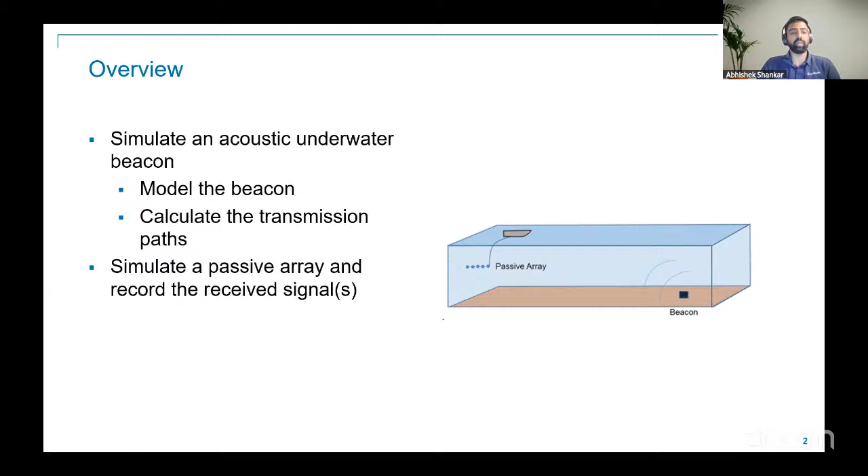All right. The last one we're going to do is of course the main part, which is using the direction of arrival algorithms to estimate the direction of the beacon. MATLAB has a bunch of algorithms inbuilt that you can use to get the direction of arrival.

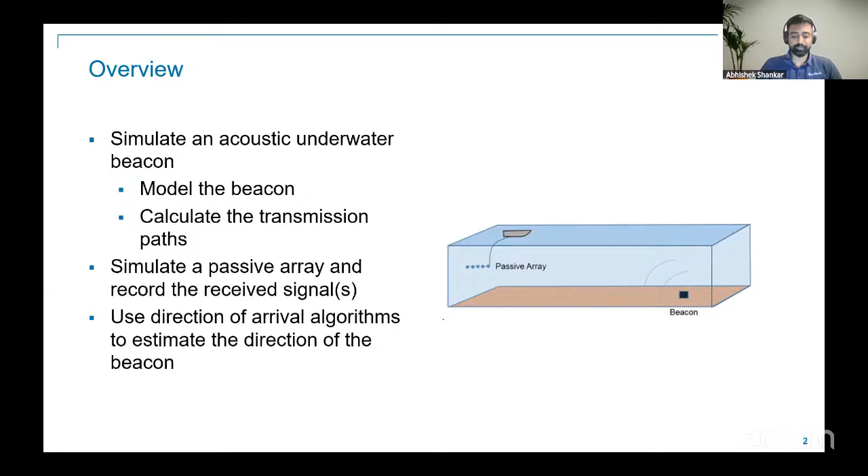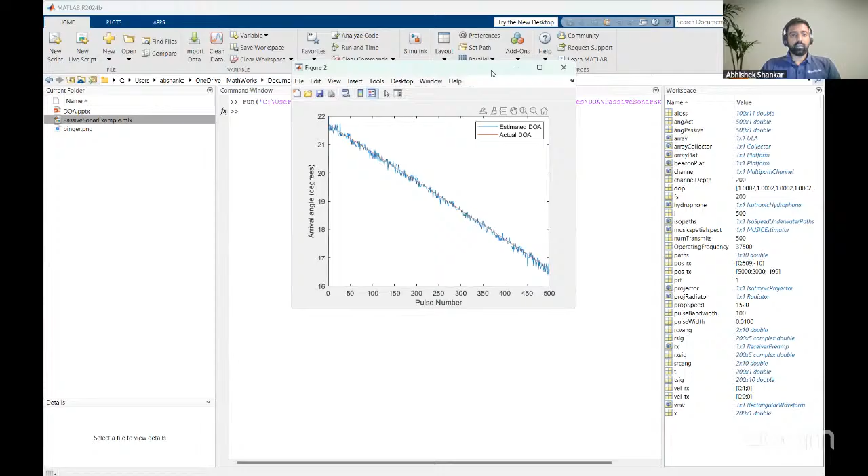And yeah, enough of slides. I'm going to switch to MATLAB. Let me quickly switch to MATLAB. Yeah. And I'm going to be opening up. Sorry, not one. I think you just saw the results of what I was going to show you. But yeah, this is what we're going to be working with today.

This is already a built-in example with the MathWorks. I can share the link to you in a bit. So if you just search for locating an acoustic beacon on Google, this will probably be one of the top results that you'll find. So I'm going to walk you through the example.

So it's got a lot of different things going on here. The first, like I said, we're going to be simulating both the beacon and the passive array. So that means the waveform from the beacon, how the beacon propagates through the water body, and also how the passive array is going to receive all these signals. And then we'll plot the received signal. And then finally, we'll go to estimating the direction of arrival.

To set the scene a little bit, we are taking a simplistic pool surface. As you can see, there are no other obstacles. It's just a beacon located 1 meter above the bed or the floor of the pool. And then we have a boat that is towing a passive array. So if you're in a RoboSub competition, you might already be underwater with your own hydrophone. But if you have a boat, it's typical to have like an arm or an extension that goes underwater with the hydrophones placed on those extensions.

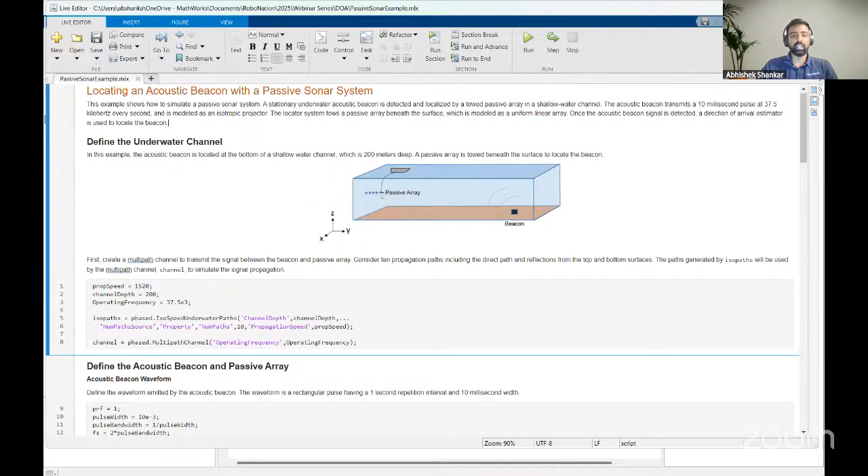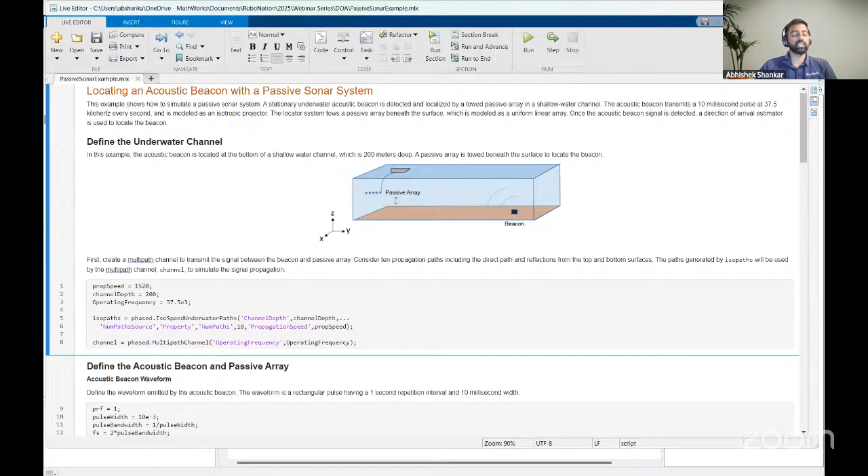And the towed array that's going to be attached to the boat is a uniform linear array. So as you can see, all the five hydrophones are in a straight line, along the y-axis. So it's a linear array of hydrophones, but there are different configurations that you can use to set that. I'll come to that in just a bit, but first let us go ahead and define some of the properties of our beacon and passive array.

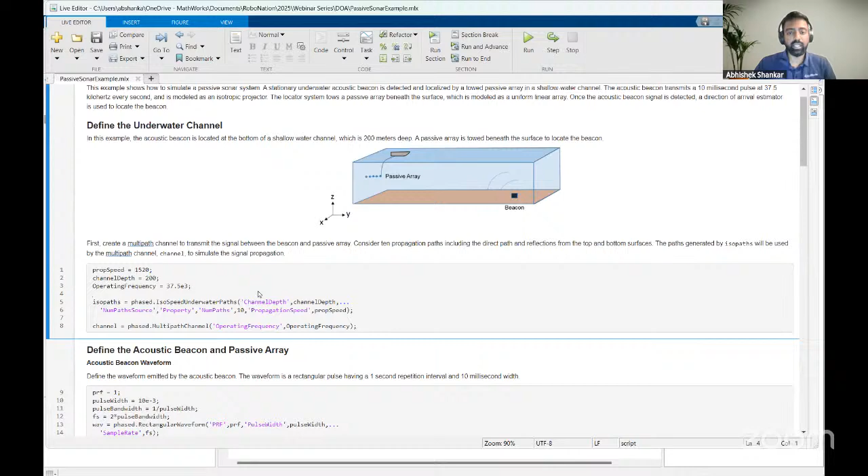The first one is the propagation speed. I'm going to be setting it to 1520. This is in meters per second. This is the propagation speed of sound underwater. It's close to 1500 meters per second. Again, it depends a lot on where, if it's ocean water, if it has a lot of salt content, or if it's just pool water.

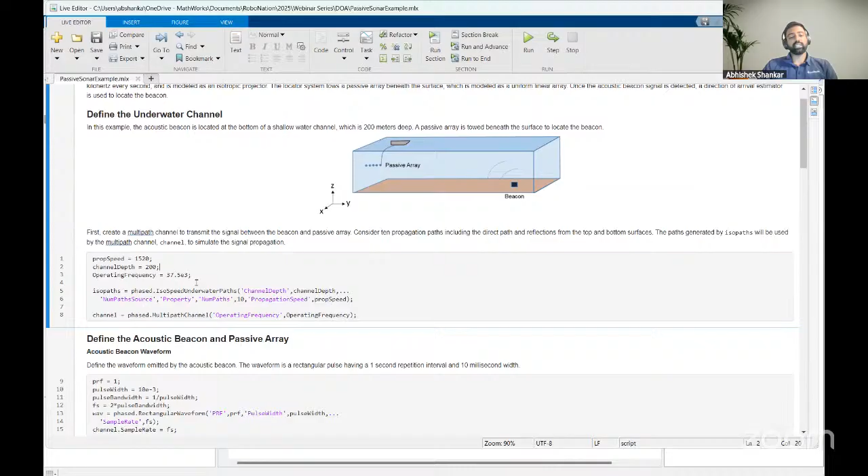So the composition of your water affects it, but it's generally close to around 1500 meters per second. And we're going to set the channel depth to 200 meters because we are assuming the pool is 200 meters deep. And the operating frequency is set to 37.5 kilohertz, as I had mentioned before.

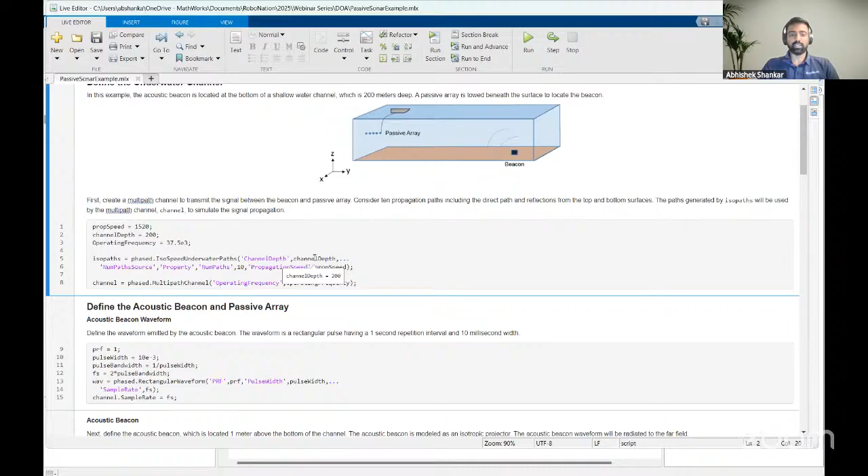Right. And the first thing that we're going to do is specify all the paths that the beacon can take. So I'm going to be using the isospeed underwater paths from the Phased Array Toolbox. Actually, before I go into what this does, let me quickly show you what the Phased Array Toolbox does. I think it might be relevant to a lot of you.

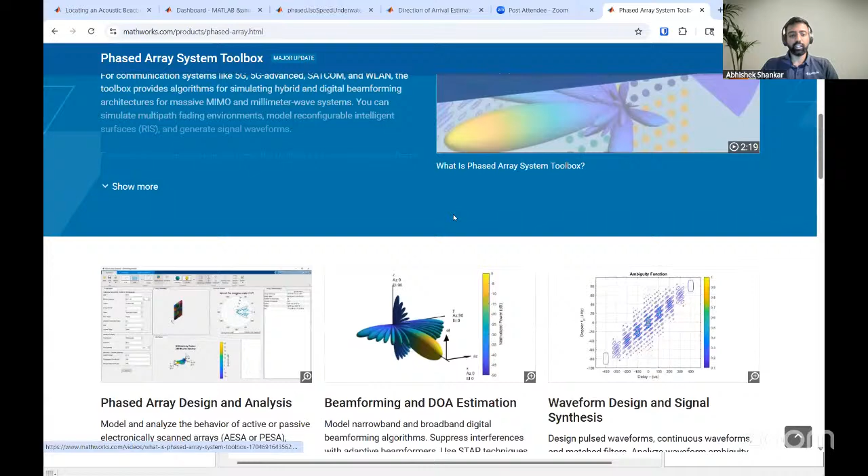Just Google phased array. So this is one of the toolboxes that is included in your free license. What you could do is you can design phased array systems. You could do direction of arrival estimation, which is what we're going to do. You can also design waveforms and synthesize signals. And you could do radar and sonar and all this cool stuff with this toolbox.

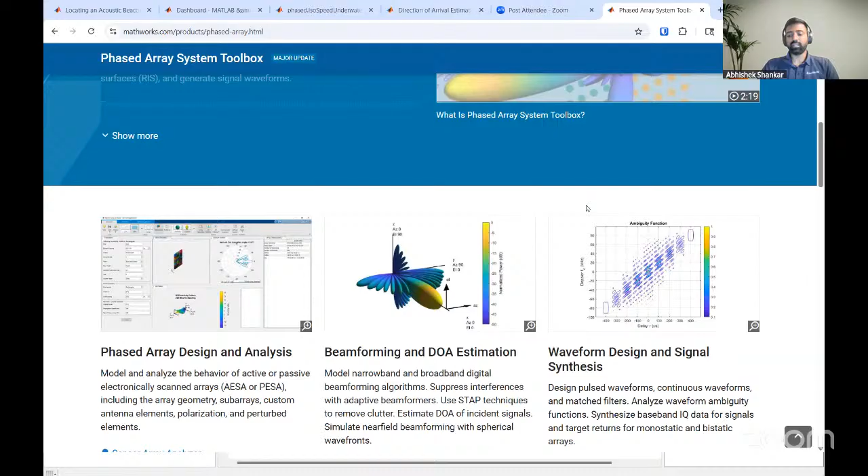So it's really useful when you're working with phased array sensors like hydrophones, radar, sonar, ultrasonic, and all these different systems. And if you've never used this before, I'd highly encourage you to go check it out. Again, it's included in the license that you have along with RoboNation. So you should have all the functionalities and all the apps that come along with it. Right. Let me get back to MATLAB.

So from the Phased Array Toolbox that I just showed you, we're going to use the isospeed underwater paths function, which will define all the paths. And you can set the number of paths that you want to simulate as a property, and then the value to whatever you want. I'm going to be setting it to 10. So we're going to assume there are 10 different paths that the waveform is going to take from the beacon to the passive array. But again, you can increase or decrease it based on the complexity of your environment.

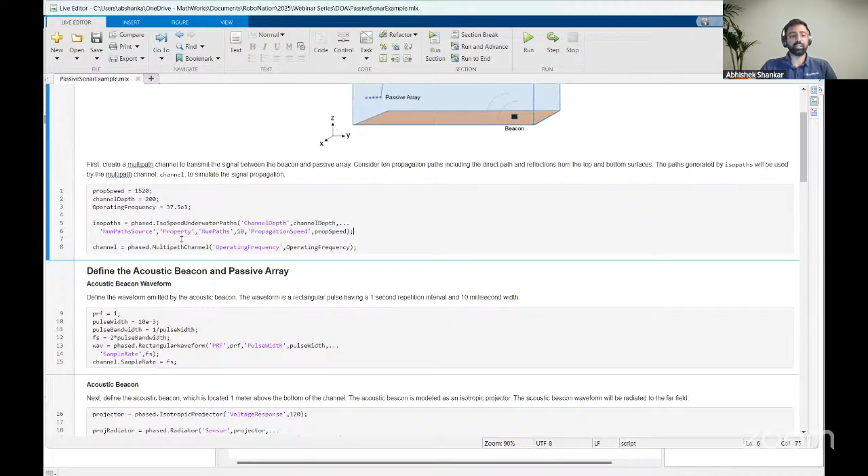And then we will use the multipath channel and set the operating frequency, so it knows that the signal is going to be propagating through this channel at this particular frequency. Let me quickly run this section. I'm going to be running each section as I talk about it, so that all these parameters are defined, and it's easy to move along.

So once we have that defined, the next step is to define the acoustic beacon and the passive array. Before we go to the beacon, let's do the waveform first. It's going to be a rectangular waveform with a 1 second repetition interval. So we're going to set the PRF to 1, and PRF is the pulse repetition frequency. And then the pulse width, or the width of the rectangular pulse, is going to be 10 milliseconds. So it's 10 raised to the power minus 3.

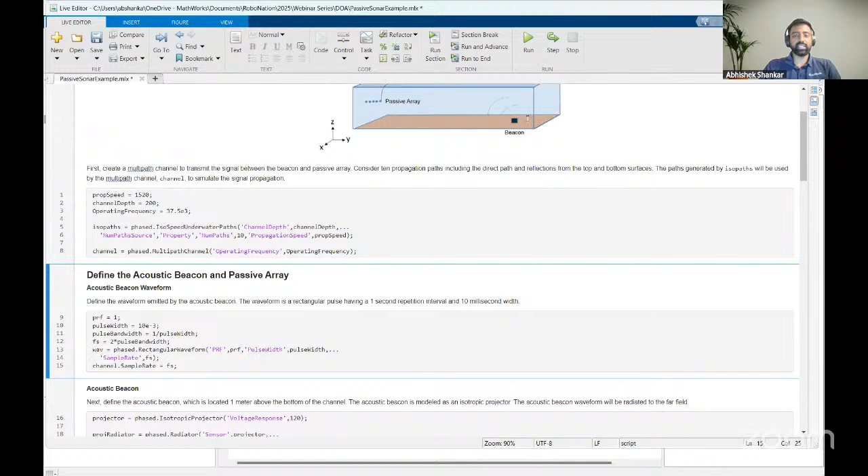And the bandwidth is just 1 divided by the width. And the sampling frequency is going to be twice the pulse bandwidth. And you can then use the rectangular waveform from the Phased Array Toolbox and pass in all these properties that we just defined to create your waveform, and then set the sample rate to what we had just defined. So far it's pretty simple. We are defining the paths that the beacon is going to move in, and also the waveform that's going to move in those paths.

And now we'll come to the acoustic beacon, which is this black dot over here that you see. So in RoboNation competitions, you'll have a beacon randomly located in your pool. Here, obviously, since I'm simulating it, we know beforehand where it is located. But when we go to the direction of arrival estimation, we are not going to know where it was located, and we'll just look at the received signals to estimate the direction.

But for modeling purposes, we're going to model it as an isotropic projector. Again, that means it's going to have the same signal strength in all directions. And then it's going to radiate with the propagation speed set here and the operating frequency that we had defined here. That's, I think, 37.5 kilohertz.

And of course, the beacon platform is located 5,000 meters in the X direction, 2,000 meters in the Y direction, and then negative 199 meters in the Z direction. So it is 1 meter above the floor of your pool bed or seabed. I think seabed is more appropriate because our distance is in kilometers.

But essentially, this is a huge location that you're looking at, and the beacon is set like 5 kilometers away, and it's emitting a rectangular pulse, and we're gonna try to figure out where it's coming from.

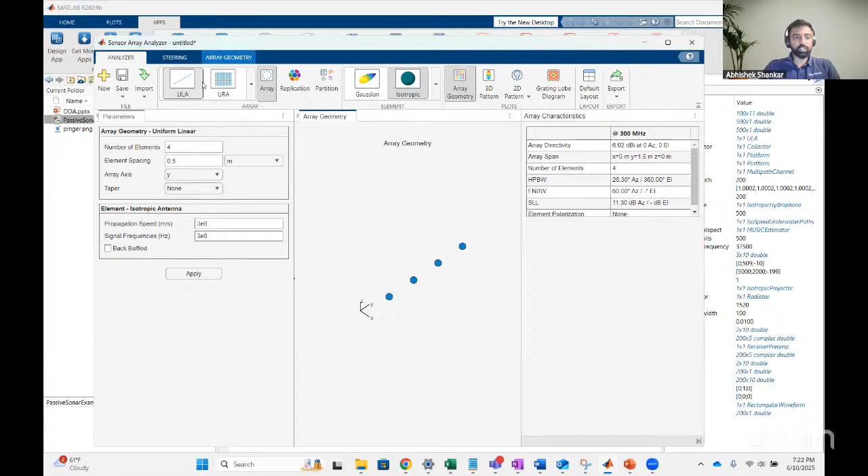So I'm going to switch back to linear array right now. But these are different ways that you can set your hydrophones. Next, I'll show you how we can check if that would be a good configuration for your system. So once you've chosen the configuration, let's say it's linear, and I'm gonna have five elements in this, and the spacing is gonna be 0.5 meter. I can change it to 0.1 meters.

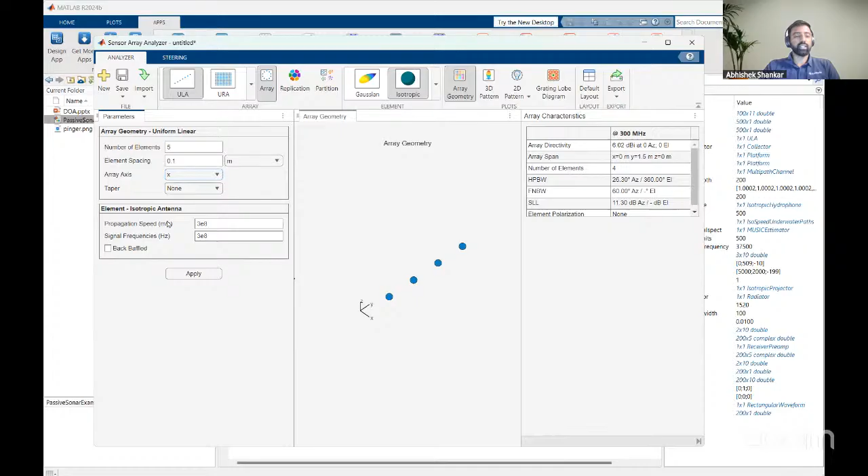But you also have an option to set your spacing as a function of your wavelength. These are two commonly used metrics when it comes to designing sensor arrays in the signal processing field. So depending on what you want to model it as, you can choose meters or wavelengths. And then your array axis is the axis along which your sensors are going to be arranged. So here I've chosen along y-axis. I can change it to x-axis, for example, and then you can set the frequencies and the propagation speed, and then hit apply.

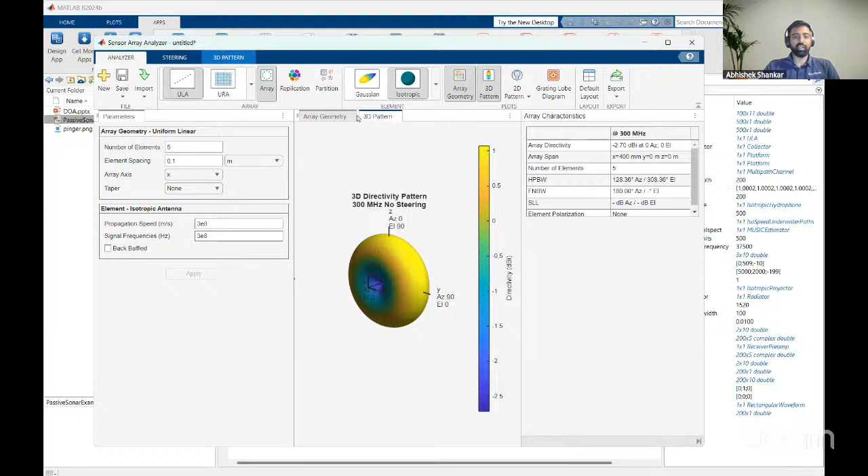And what you can do after this is you can look at the 3D pattern. Oh, actually, before I talk about 3D pattern, I forgot to set one important thing, which is the hydrophone. For our example, we're obviously going to be modeling a hydrophone, but with this app you could do microphones, antennas, polarized antennas. So for any different application, you'll have something that you can choose. And for us, it's going to be a hydrophone. So let me select a hydrophone.

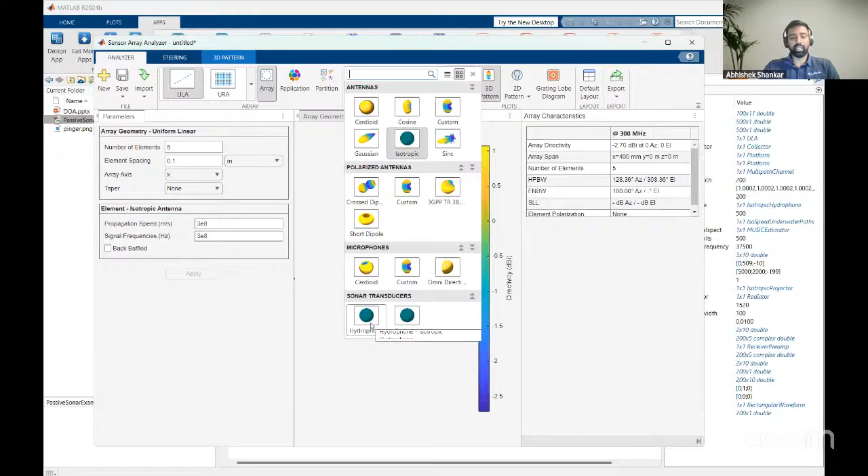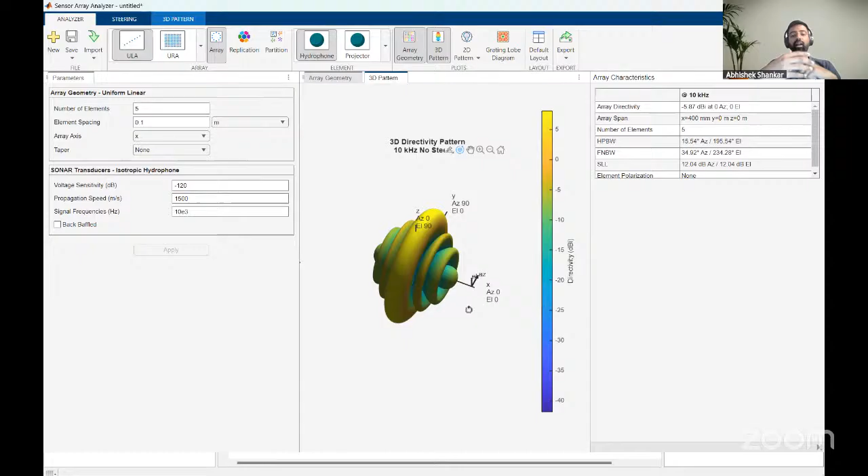And then again, the 3D pattern visualizes what kind of signals it can receive. So if you look at this, since the array is arranged along the x-axis, you're gonna find all the signals coming from around the x-axis. So if this is your sensor array, you're gonna get signals from all the other directions, but not directly in front of the x-axis, because if you look through the x-axis, you're only gonna hit one or two sensors, right? So it's not gonna give you as much coverage as a circle along the x-axis.

So this is something that you can use to determine if this configuration would work for you. Again, you can play around with different configurations and see how the pattern would be. And there's a lot of experimenting going on in these kinds of situations, because a lot of times you don't know where the beacon is, or what situation you'll be in. So you'll have to play along with the parameters and then figure out what configuration works for you.

That's actually one of the advantages of simulation, because you can simulate different kinds of sensor arrays and see how it would receive the pinger signal and then use that as a starting point for your hardware design. Obviously, there's going to be differences in simulation and hardware, but you could ideally reduce the time taken to come up with your final design if you use some sort of simulation in your design process.

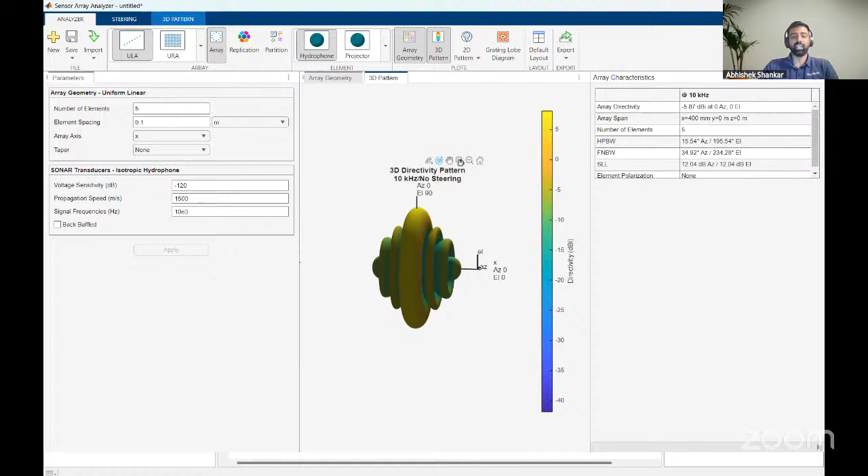And I'm sure most of you are aware of this, because I've seen a lot of reports where you guys do a lot of simulation stuff, fluid analysis, dynamics, and all these things. So you are pretty familiar with the importance of simulating things before going ahead and building it in hardware.

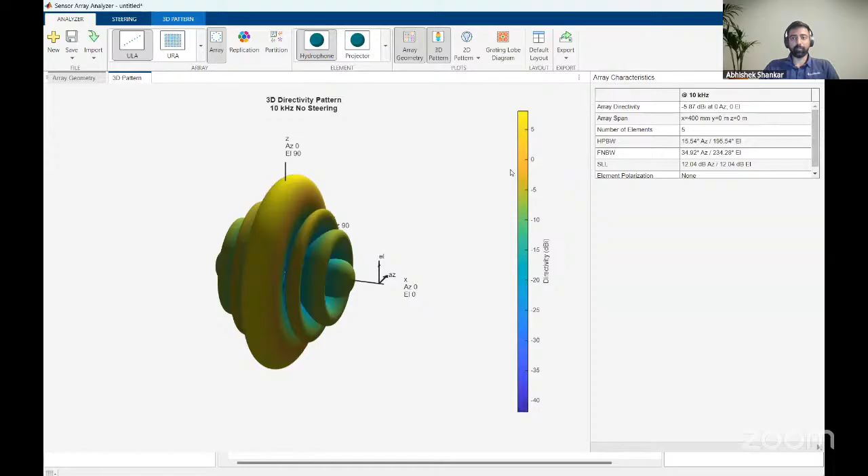I am gonna close this one. But that's what you can use to simulate your sensor, and you can also export it to your workspace. Now let me quickly go back to the live script. Excuse me.

So the towed array in this system is going to be a linear system, so it's going to be arranged in a straight line. And we're going to set the hydrophone voltage sensitivity to negative 150. And the phased array is the ULA from the Phased Array Toolbox, which is the uniform linear array, and it's going to have all these parameters. You basically say what the element is. The element is a hydrophone.

There are five hydrophones, and the spacing is the propagation speed divided by 2 times the operating frequency. Excuse me. This is a pretty common formula used in signal processing. But again, you can also play with the element spacing because depending on your spacing, it can really play a big part in how your received signal comes out to be.

And then again, you're defining the collector, which is going to be a sensor array with this propagation speed and your operating frequency. And the array platform is going to be initially located at negative 10. So it's going to be at the origin in X and Y, and then negative 10 from the surface of the water. So it's 10 meters below the surface of the water.

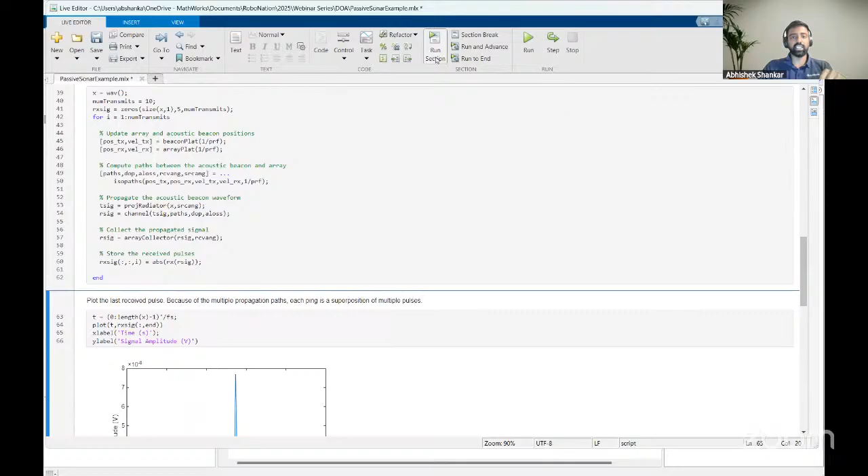And once we have that, we can now plot one of the responses. Since this has multiple propagation paths, it's going to be a superimposition of all the paths that it took. So you're going to see some noise and some different peaks, but you can see one clear peak, which is the time at which the hydrophone system, your passive towed array, got the peak.

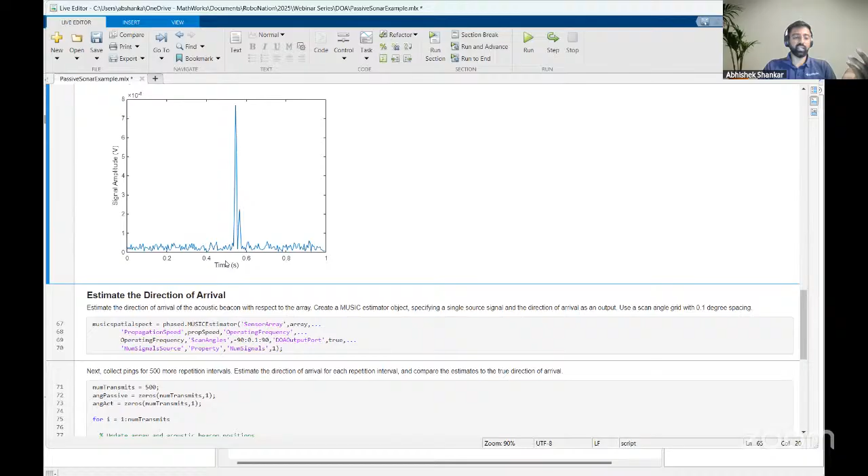So this is the prelude to what we are going to do next, which is the direction of arrival estimate. And in most competitions, all of these things you don't have to do because you don't have to simulate a beacon. You don't have to simulate a towed array because in the competition you will have an actual beacon and you'll have your hydrophone. So you will already get this waveform. You will record the signal to your hydrophone, and then it'll look probably something like this.

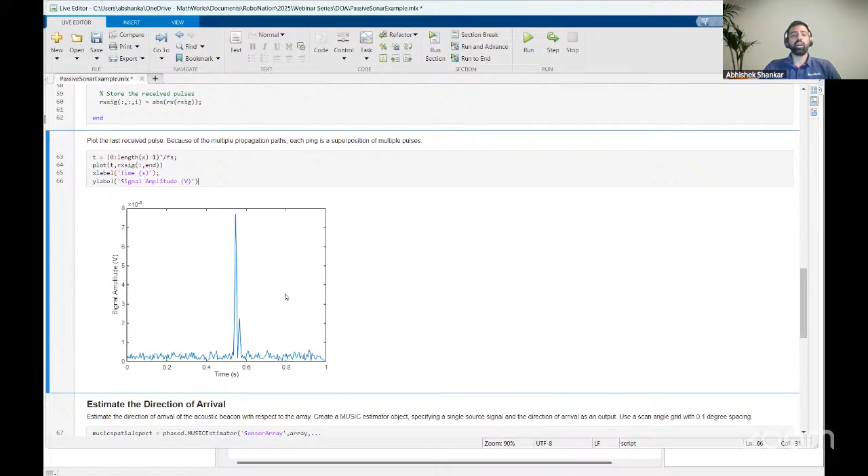There might be more noise depending on the hardware. Mine is a simulated system, so noise is pretty low, but in an actual system, you're going to have more noise. And if you hadn't been in my previous webinar, which was about filtering these noises, you can go check it out. But I talk about how we can filter the noise out of your sensors and then use that for further algorithm that you're

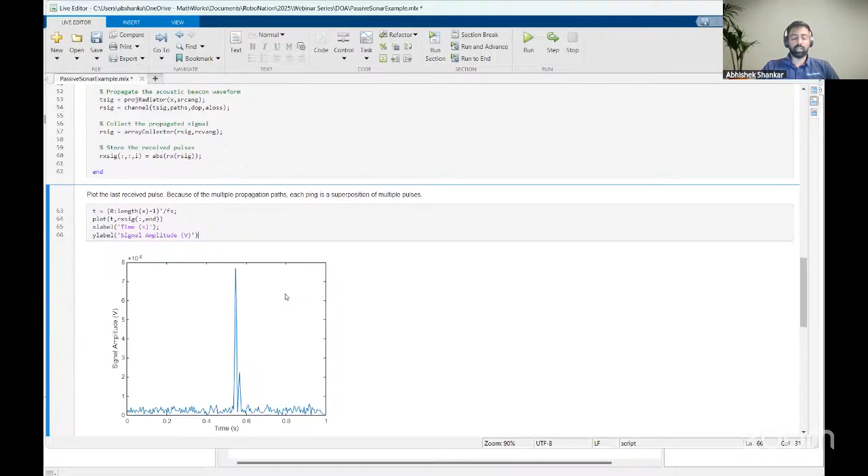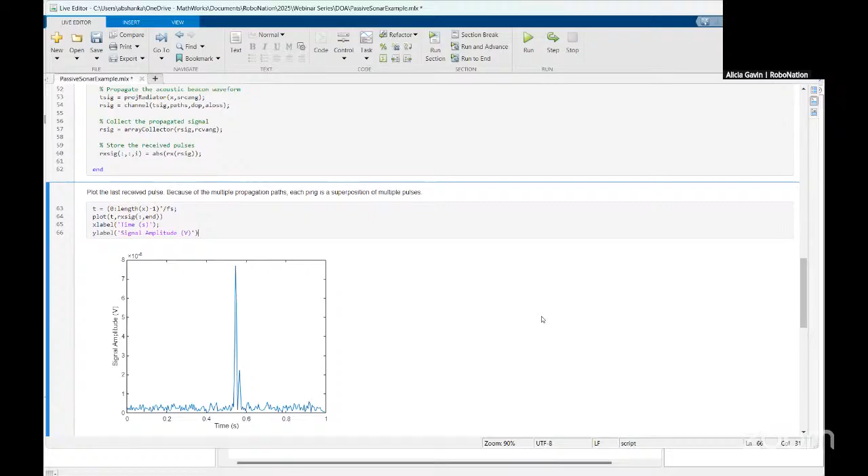using the sensor. So now that we have come to this part, are there any questions that I can answer? Yes, we've got 4 questions. Okay. One of them, I think, can be answered by what you just said about checking out one of our other webinars about filtering noise.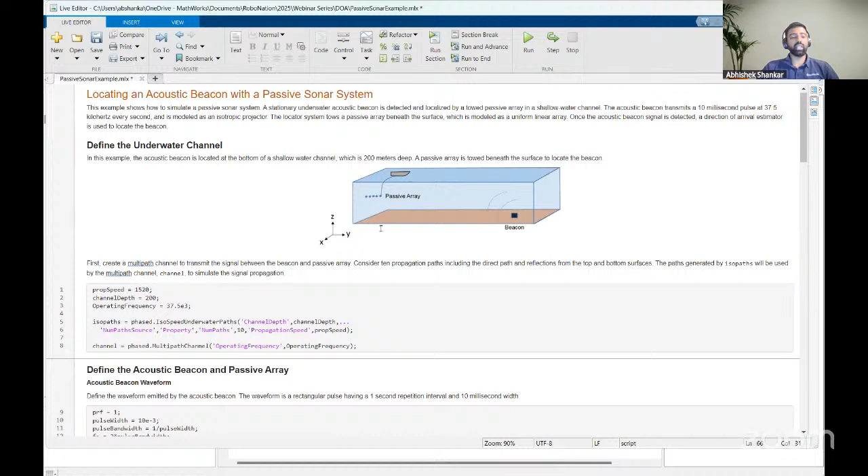But we've also got one: how can we adapt algorithms used in towed passive sonar arrays for smaller onboard hydrophone arrays on AUVs? So the system really doesn't change a lot. The only thing that's going to be different between a towed and an onboard system in an AUV is that your depth is going to change, right? The depth changes based on the speed of your AUV. So if you're going down in the z-axis, you're going to change the speed there. So what you would do is change the speed in the array platform over here. So if it's moving in the z-axis, the depth will change, so that would also change.

And also you can change the configuration because I've seen a lot in RoboSub, the hydrophones are usually modeled as a uniform rectangular array. So you have 4 hydrophones in a 2 by 2 matrix. But depending on how you model your system, you can set it up from the app that I showed before. But ideally, you should not see a lot of change between a towed and an onboard array.

Awesome. Our next question was, how does ambient noise affect accuracy in shallow water? Noise is always going to play a part in shallow water, and even in depth. There's going to be some noise. It's unfortunately not something that you can easily get rid of. You'll have to do some signal processing to get rid of the noise. One way that I would suggest is remove the beacon and then just put your hydrophone in the depth that you'll be operating in and record the signals.

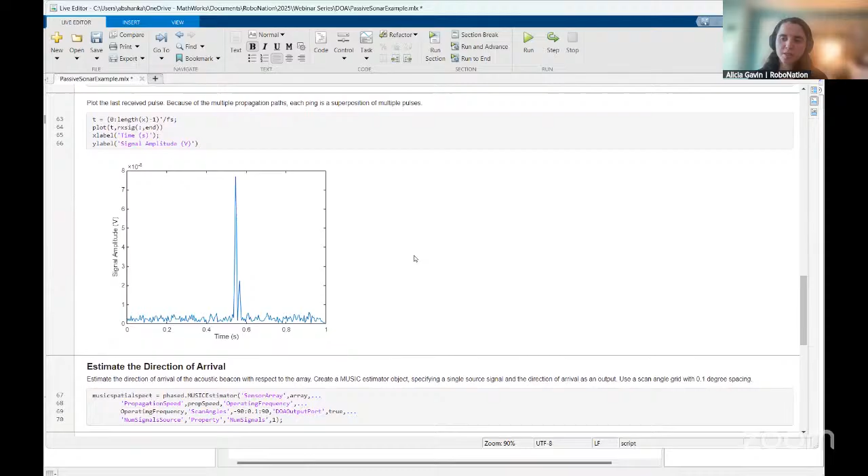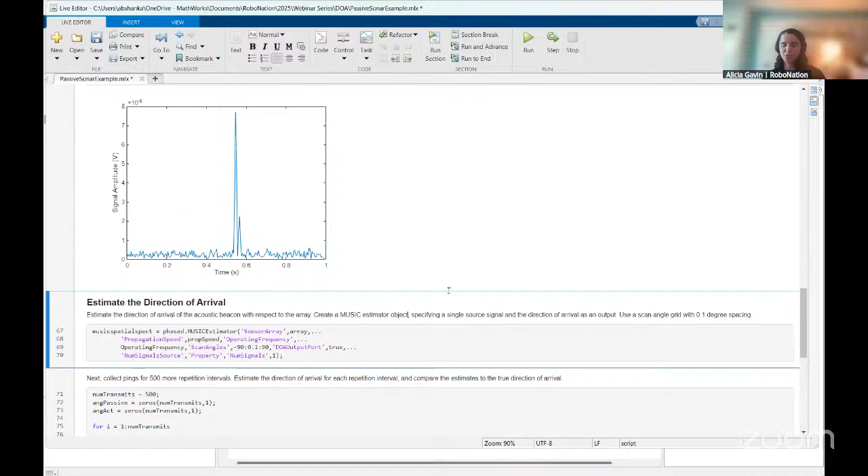Ooh, that is something that I have not had a lot of experience with, but thank you for asking that question. If you can email that to me, I can get back to you. We have some experts in beamforming and the other aspects of signal processing that can probably help you with that. I can put you in touch with someone who is an expert in that field, and they'll get back to you within a day. Yeah, and Mac, because I think you were the one that asked the question, if you can email Abhishek, his email is in the chat, and he will be able to get you an answer for that. Thank you.

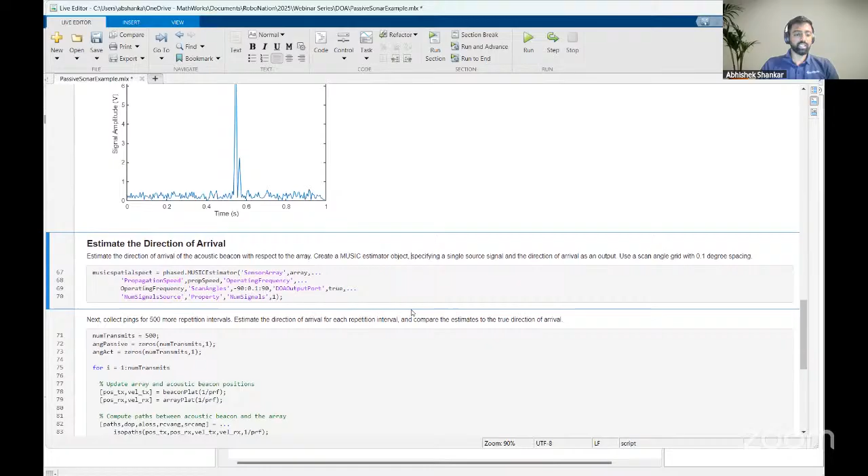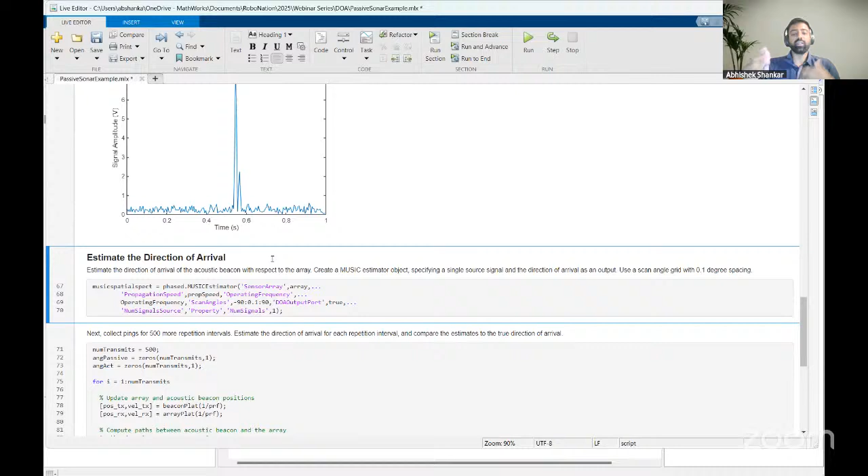All right, so the next step is the fun part, which is estimating the direction of arrival. So if you're in the competition, this is where you probably start. So you won't have to do all this step that I just did, because you are more fortunate than me. You have a hydrophone and you have a beacon and you can get all the responses and you don't have to do the simulation stuff.

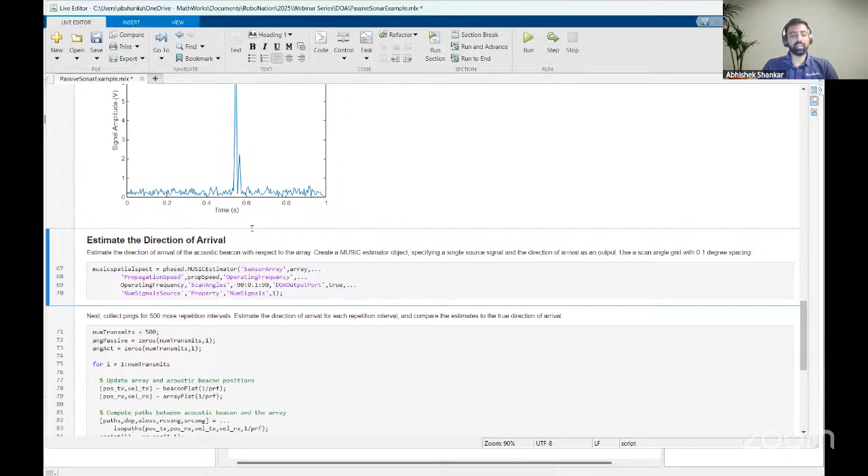But for this webinar, we're going to try to estimate the direction of arrival of the simulated beacon. And what we're going to do is use the MUSIC algorithm that is inbuilt in MATLAB. So I'm going to quickly switch and then show you some of the stuff that we have inbuilt that you can use.

Right. So in the Phased Array System Toolbox, there are a bunch of different algorithms that we have for direction of arrival estimation. So for a specific array geometry, like the linear array or circular array or rectangular array, we have a few different algorithms that you can look into. You have the MUSIC estimator, which is what we'll be using for this webinar, but you also have the beamscan estimator. You have the MVDR estimator.

And then you also have the sum difference monopulse tracker. And if you're using an arbitrary geometry, then you also have all these different algorithms that you can use. So I would play around with a bunch of them.

If you're pretty good at signal processing, you should have no issues just setting all these parameters, but we also have great documentation. If you're not really familiar with how to work with these algorithms, you can just look at our documentation. It's pretty detailed, and of course you can reach out to me either through email or through Discord. I'm in the RoboNation community, so feel free to reach out and I can help you out with how to use these algorithms to determine the direction of arrival.

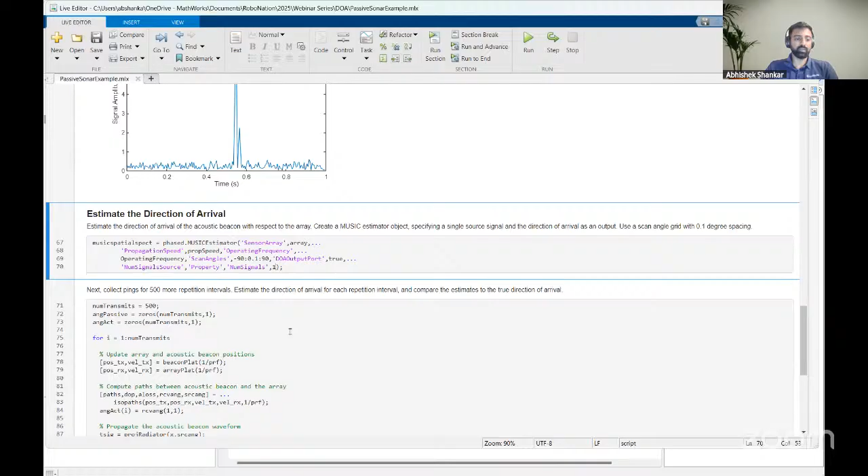So once we have that defined, the next step is we're going to simulate 500 pings from this beacon and then collect the data and use that to estimate the direction of arrival. Again, if you have the hardware, you're going to collect a bunch of data. It doesn't have to be 500 specifically. It could be any number. The more, the better. So I'm gonna do the same thing that you would do in hardware, but I'm simulating how it would look if you collect a bunch of stuff.

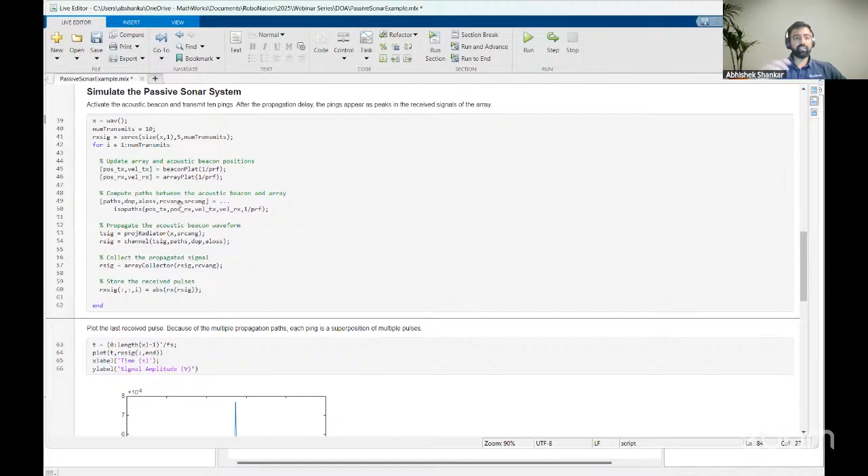So let me run this section, and then this for loop is pretty similar to what we had before right here. We simulated 10 pings from the beacon. Here we're gonna just go for 500. All the steps are pretty much the same, except for this one, which is now using the MUSIC algorithm to estimate the direction of arrival for each ping. So we're getting 500 and then we're getting the estimate for each of them. Let me run this. It's going to take a second because there's 500 simulations.

Once that is done, we can plot the angle. So this is the angle that the MUSIC algorithm has estimated. And we know the actual angle because this is a simulated system. And then let me actually zoom in and show you that the actual estimation is pretty close to the angle. So it's within a degree or two. Actually, it's within a degree. So this is 20 and 20.5. So within 1 degree of error. So that is pretty good for the system.

Again, this is a pretty isolated system with very little noise. So this is pretty close to how an ideal system would work. You might have to tune it a little bit more to get such good accuracy. And it also depends on how fast your sub or your boat is moving. So if you're moving pretty fast and changing directions frequently, that would also be a source of a lot of errors, because again, it's hard to get the algorithm to converge when you're moving in different directions.

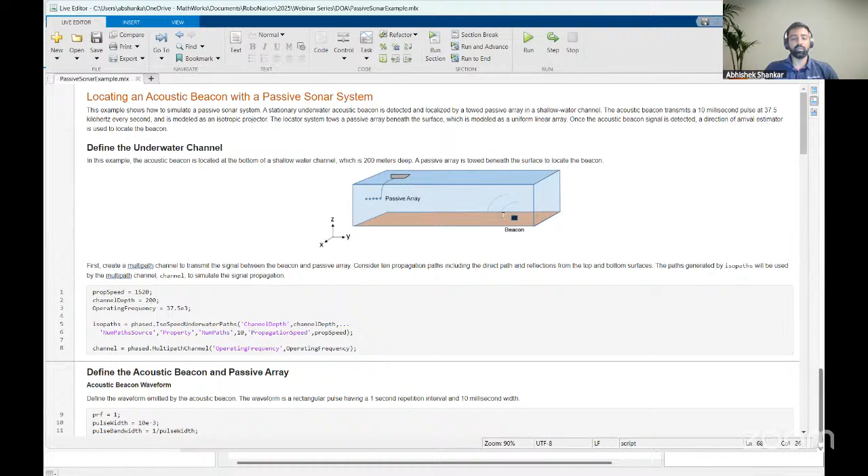This is also useful if, let's say, you're running out of time for your competition, but you want to show the judges that you attempted this task. This would also gain you points when the judges judge you. I know this because I have judged teams. We look at the effort that you guys put in, and we see how much detail was included in your thought process. So if you include something like a detailed simulation that is shown here, that would count towards your report score and your design score.

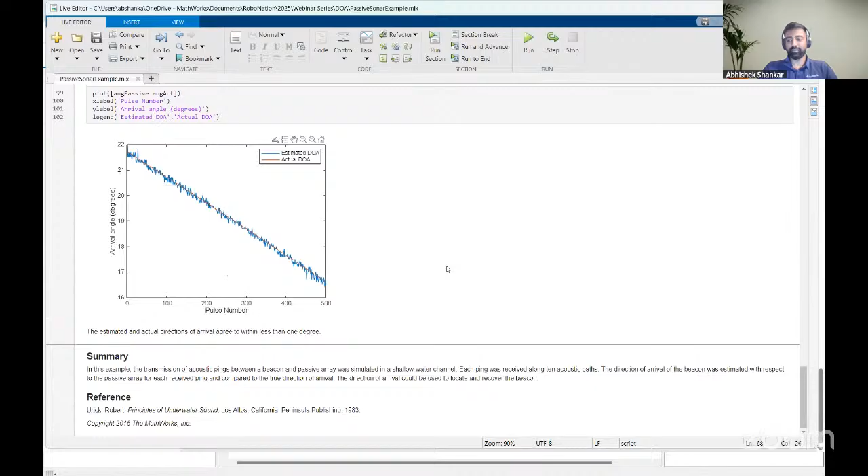All right, Alicia, do we have any other questions? You've had a lot of fans in the last few minutes of the webinar. Okay, then one fun last question. They said, not as much about this session, but how did you decide to start working at MathWorks? Oh, that's an interesting question. I've gotten a lot of curveballs tonight.

Yeah, it's fine. When I was doing my master's, I was doing it in surgical robotics. That was something that I was really interested in. And I actually did not use MATLAB a lot before that. Then I used it for one of the courses that my professor taught, which was in MATLAB, and I found that it was pretty good. And then when I was graduating, I applied for jobs, and this was something in the robotics field, with a lot of marine robotics applications, something that I had not worked in before. I applied for it, I got the job, and now I'm super happy because I get to learn a bunch of new stuff that I've never done before.

That is awesome. And we are very lucky to have you. Like you mentioned, you've been on the student side, but you've also been a judge, so you understand what our students are going through. So you're very much the perfect person to answer a lot of their questions.

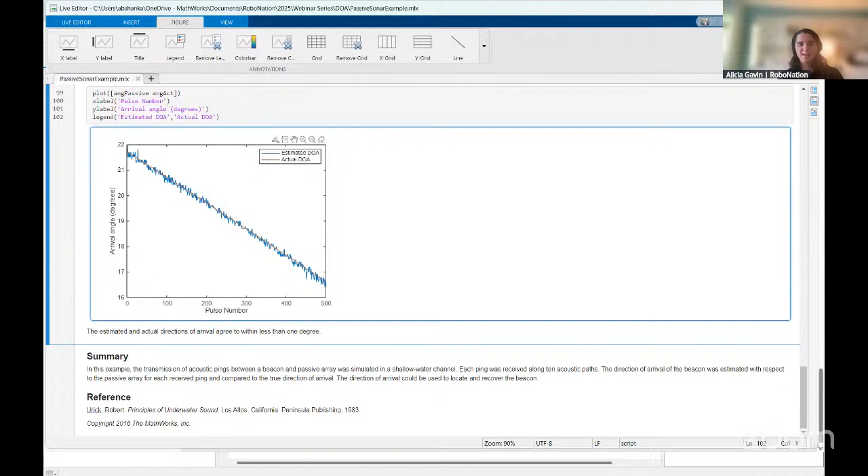And of course, for our RoboSub students, and I'm not going to try to steal your thunder if you were going to talk about it too, Abhishek, but we've got an upcoming simulation award. So I'm going to pass it over to him because he's going to be the expert on what you need to do and how to get involved. Yeah, as Alicia mentioned, we have a simulation award for RoboSub. This is worth $1,000 for the first place.

And basically what we want to see is how you use MATLAB or Simulink for any task in your RoboSub competition. So it could be something as little as how you use MATLAB for data analysis from different sensors, or it could be something like designing 6-degree of freedom controllers for your sub, or localizing your submarine using the various filters that we have, or simulating the dynamics of your submarine, or anything that MATLAB with Simulink can do.